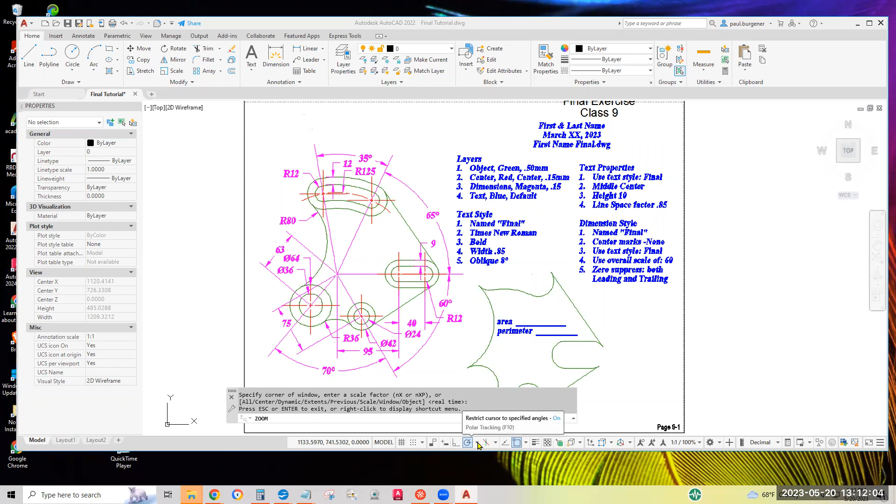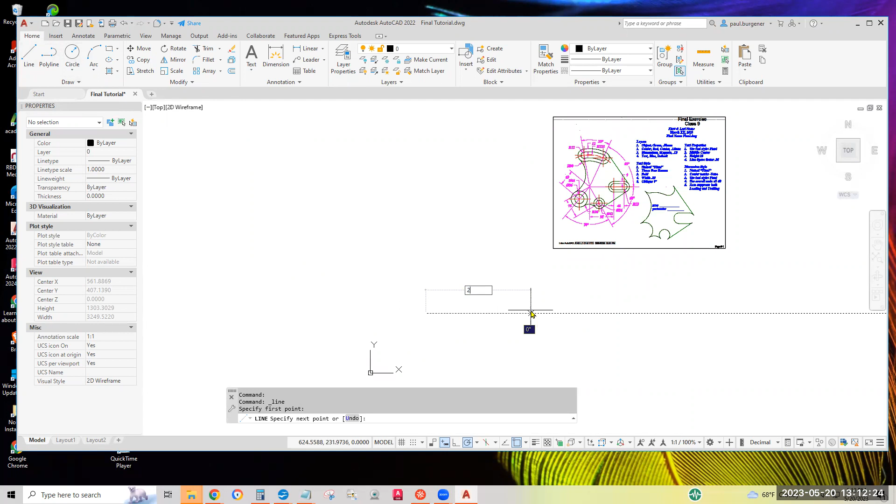It's probably easier just to draw a horizontal line and rotate 65 degrees, rotate a copy 100 degrees, rotate lines instead of adding additional angles to the polar tracking settings. So let's get this screen capture out of the way. I'll draw a line, say 200 units. Probably could be less, but I'll draw a line 200 units straight to the right. I'm going to make several copies on the top of itself and rotate one or two of the copies at a time into the right angles.

We'll use the copy command, select the line, enter, and for base point, pick any object snap, end point or midpoint. And for the second point for each copy, just click again on the exact same O snap. 1, 2, 3, 4, 5. Probably more than I need. I'll hit enter or space bar to finish the copy command. Now, if I do a list or start to do the erase command, you'll see I got 4 there. Okay, I thought I had 5, but we'll make another one as necessary.

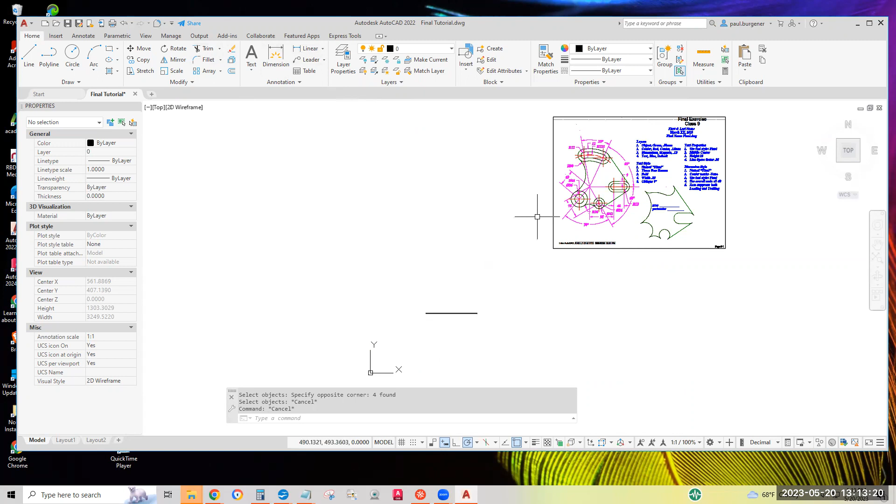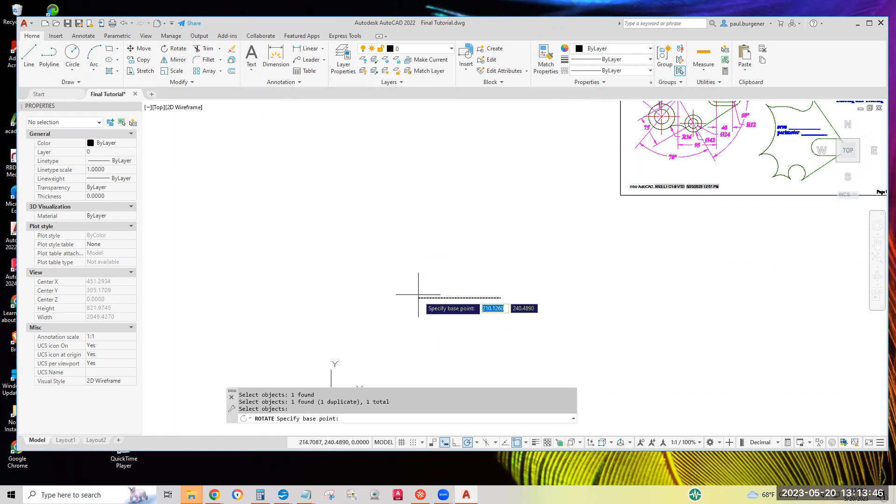Let's rotate to 65 degrees. So we'll rotate 2 of those 4 copies into the 65-degree rotation, then select one of those 2 and rotate it another 35 degrees. Okay, rotate once, 2, enter, O snap at the left end. What was that again? Positive 65 to go counterclockwise. 65, enter. I believe I moved 2.

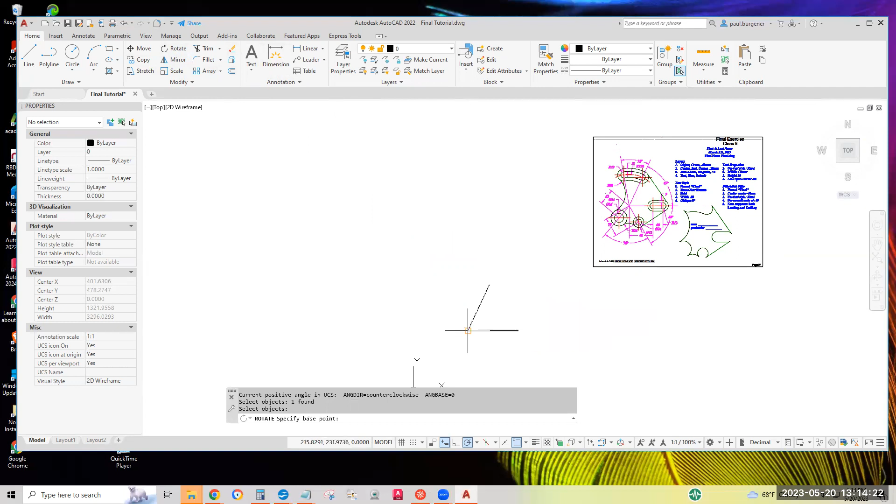Let's confirm that. I'll begin to erase, but won't complete. Nope, just 1 found. All right, I'll copy it on top of itself then. And copy there. Now let's rotate one of those diagonal lines. I got 2 there now. Rotate, select one, enter. Base point for the rotate command should be the bottom end. We'll rotate it 35 degrees, up to 35 degrees, so it'll be pointing in the 100-degree direction. 35, enter.

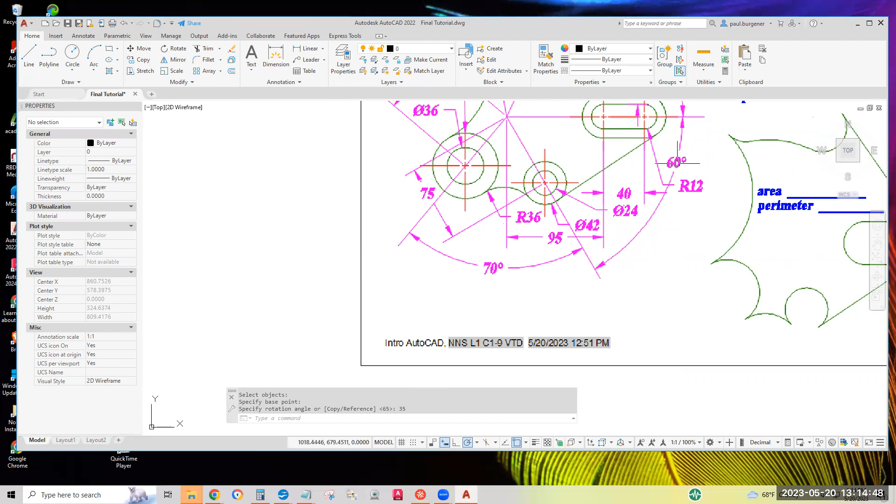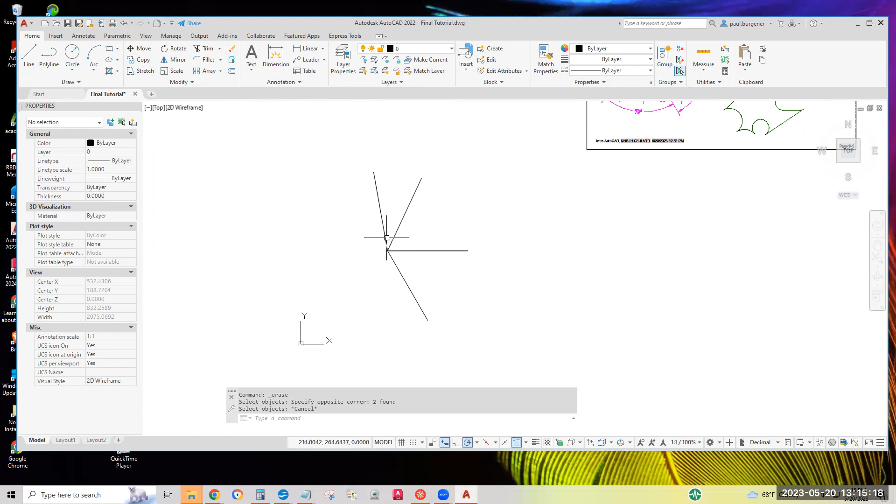Still got a few lines down here. We'll rotate 1 clockwise, so it'll be a negative rotation, negative 60 degrees. Okay, I rotate again. I'll select 1, hit enter, O snap at the left end, and type negative 60 degrees to go clockwise. I believe I still got 2 here. Let's double check. Yep, 2. This is a stack of 2 lines right here. So I'll rotate one of them negative 130 degrees for the final leg of the 5-legged spider.

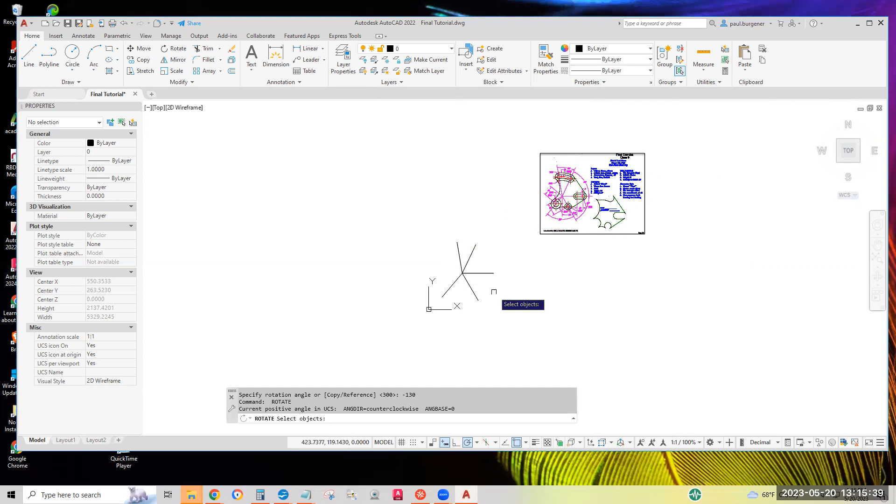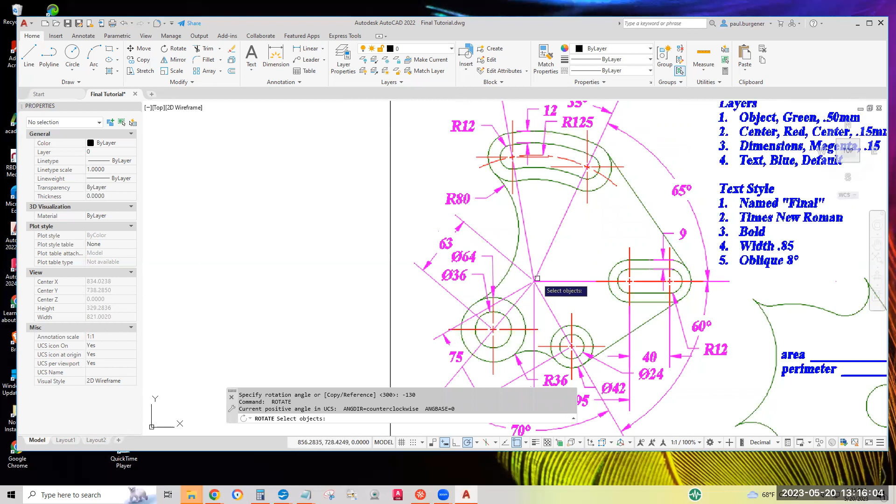We'll rotate. Select one of these, enter, O snap at the center of the spider body, and type -130, enter. So I might have the double line or two, but at least I got 5. Okay, let's start with the jelly beans at the top. I need to find a point for the left and right circles to form this jelly bean shaped slot. Both of those endpoints are exactly 125 units away from the center of the body.

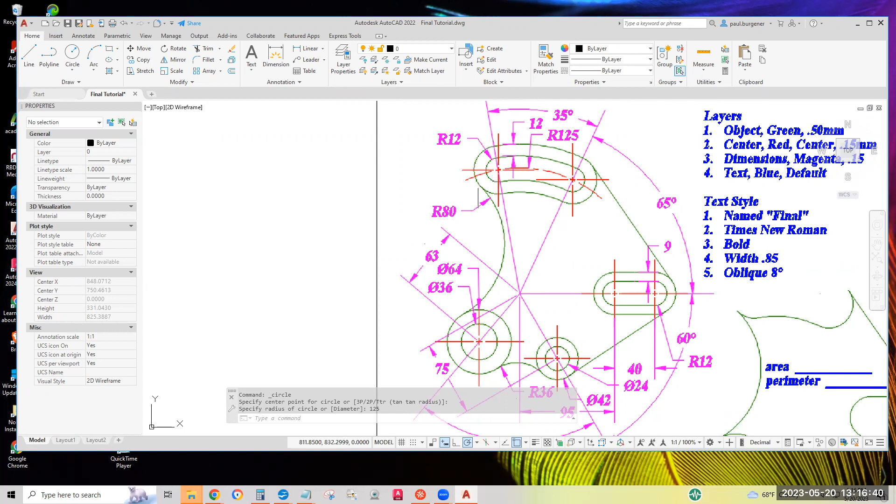So we'll draw a circle using the center radius icon. O snap at the center of the spider and type 125, enter. And again, the lines I drew are a bit excessively long, but that's okay. Let's draw circles at each of those two intersections. Both small circles are a radius of 12, and the large ones are an offset of that 12 units outward. So 24 radius would be the big circle, or just offset 12 out. We'll draw a circle center radius, click there, and 12, enter.

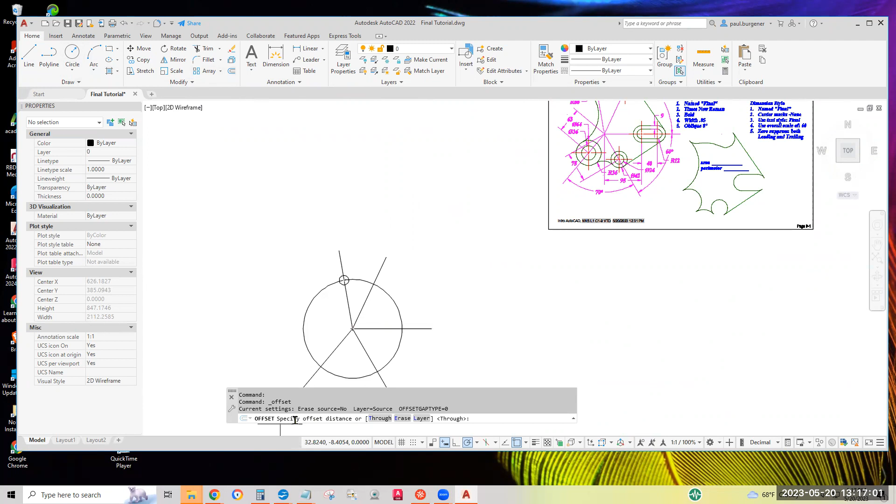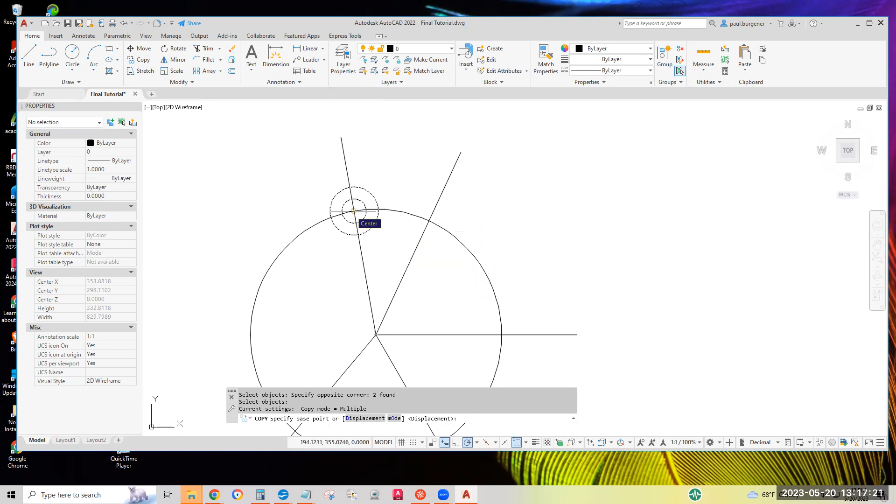We'll offset that circle we just drew 12 units outward. Offset command says specify the distance. That'll be 12, enter. What do you want to offset? Select the circle. Which way do you want to offset it? Click outside. Now to get those two over here, I'm being incredibly lazy. I'm just going to copy these two with a crossing window, hit enter. For base point, I'll use the center of the circles or the intersection. And for the second point of the copy procedure, I'll go over here to the intersection of the line and the circle.

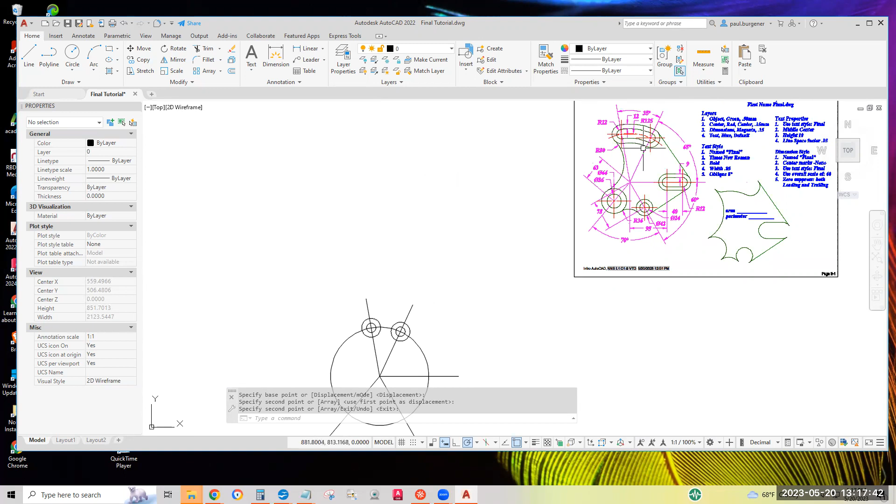Okay. What else do we need? Outer arc, a couple inner, looked like eventually 4 arcs here, O snapping at points of the circles I drew and the diagonal lines I drew.

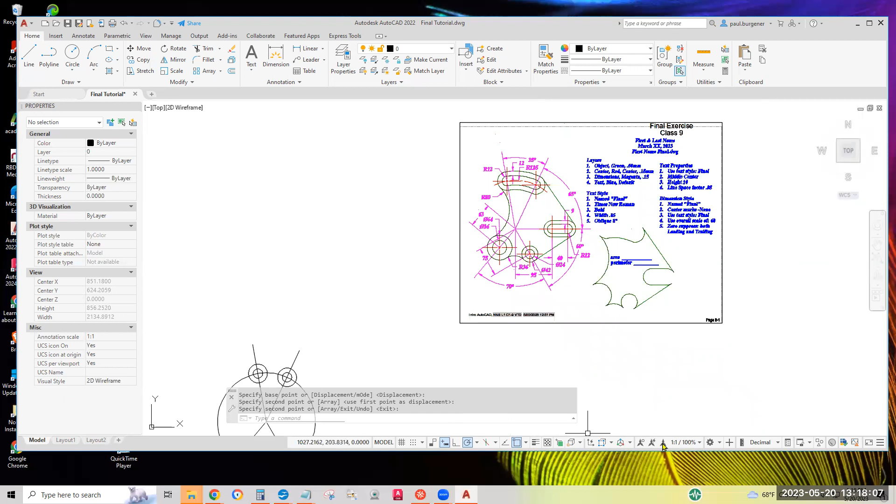By the way, as always, I got dynamic input turned on. Polar tracking is set for 90. And for object snaps, I got the 5 I always recommend: end, mid, center, quadrant, and intersection. Nothing else is turned on. All buttons are visible. Let's machine gun a bunch of

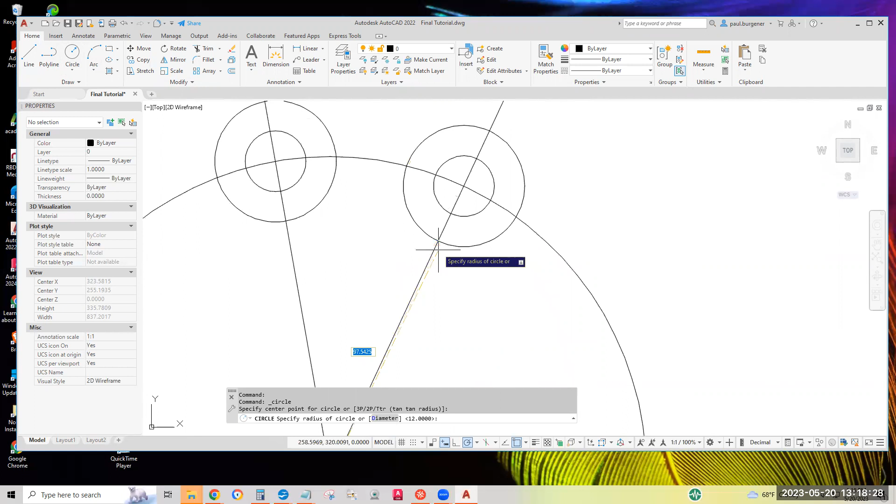circles. O snapping. Whoa, see how close that midpoint is? Good thing I caught that. Okay, and coincidentally, the line is almost twice the distance there. So, okay, very carefully slide up to the intersection there. Circle center again, O snap at the center, O snap at the intersection, not the quadrant, but the intersection here.

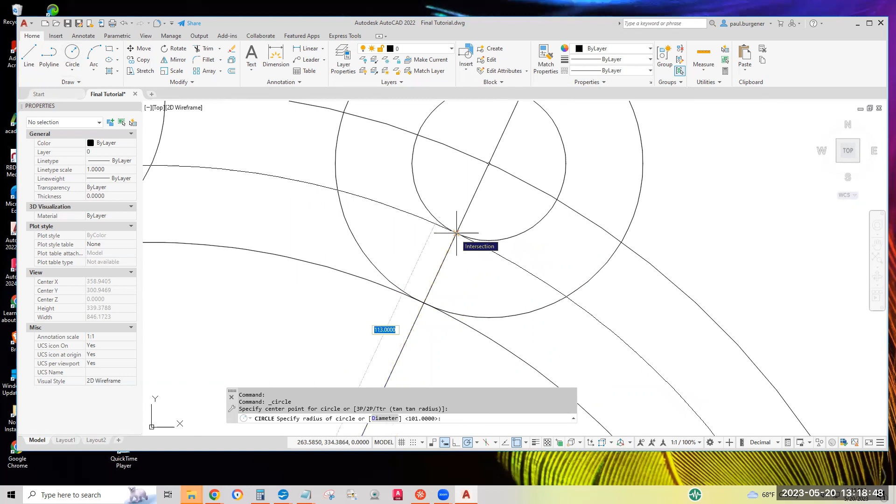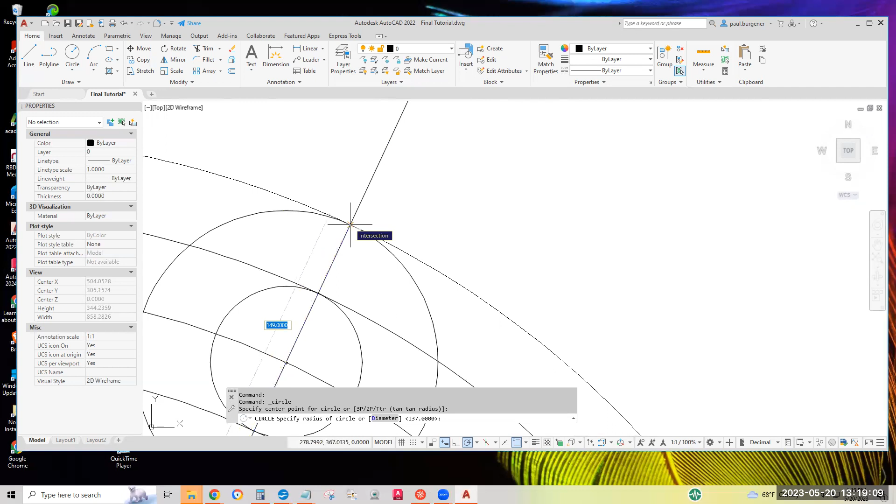Circle center, O snap again, click at the center, zoom up and O snap at the intersection again. And one more. Center at the center of the spider body and up to the intersection furthest out. There, you can see once we delete and erase, we'll have that slotted jelly bean shape up here. Let's work on this jelly bean over here now.

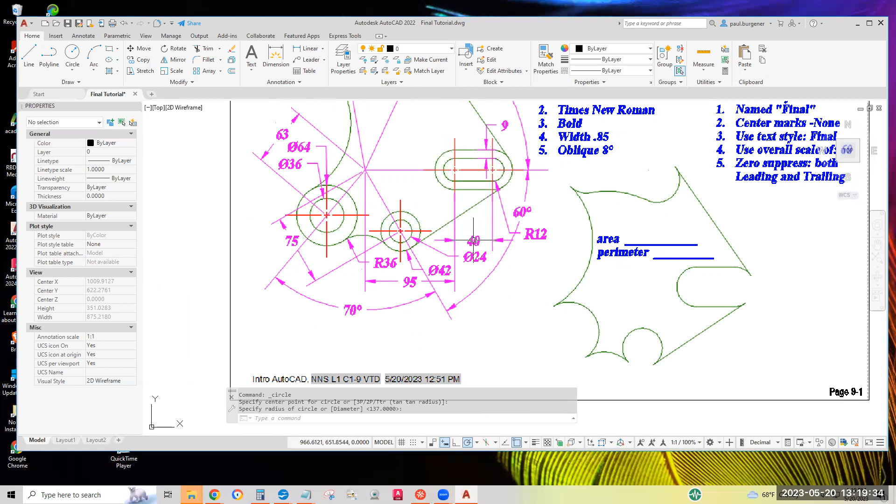The left end of the jelly bean is 95 units to the right. And then the right end of the jelly bean is another 40. So let's draw a circle center radius with a radius of 95, enter. Right there is where we want to begin the left side of the jelly bean. The circles for the left side are radius of 12 and a radius of 12 plus 9, 21.

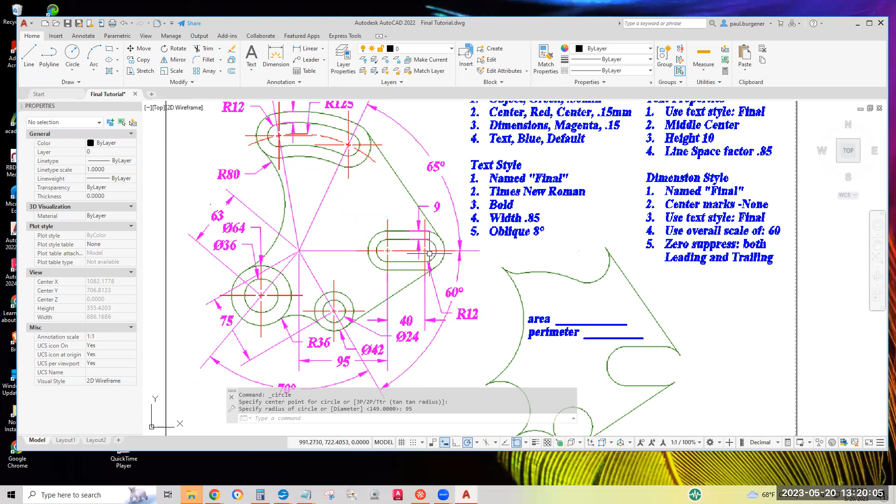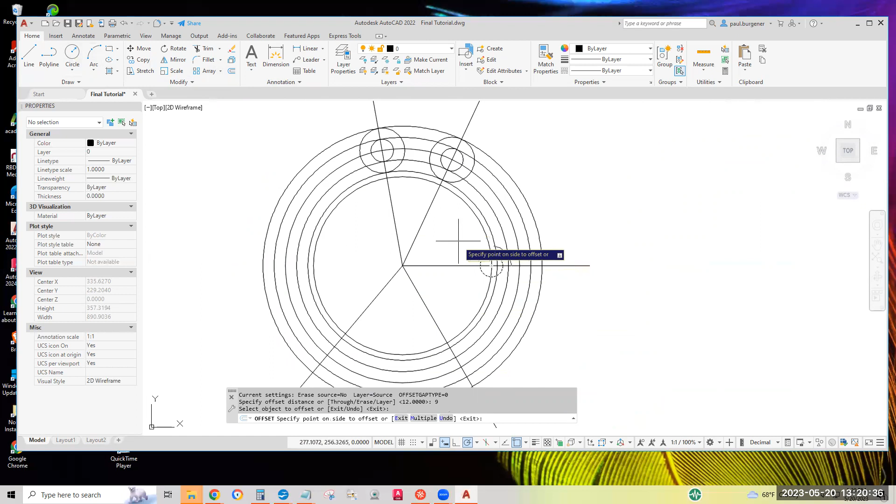Or we'll just do the same thing here. We'll draw the 12 radius circle in the center here and offset it 9 units outward. Okay, 12 and 9, I got to remember. We'll draw a circle center radius starting at that quadrant. It's also the intersection. AutoCAD just happened to home in on quadrant first. The radius of this small circle will be 12. We'll launch offset, set the distance for the offset command to 9, enter. Select our fresh circle and click outward.

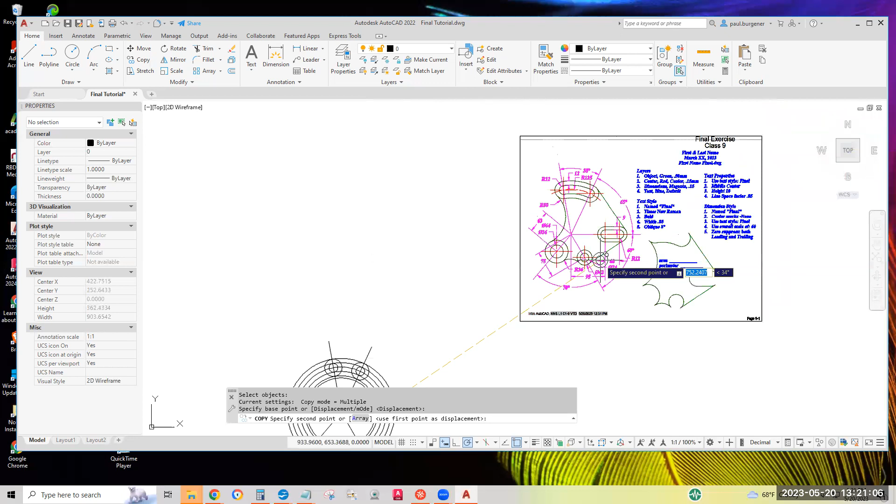Now, the right side is 40 units further to the right, so I can copy those two circles 40 units to the right to make the two circles for the right end of the jelly bean. We'll zoom back in, copy, select them both, enter. Base point would be dead center. I want it to go in this direction, but what was that distance again? 40. Line it up with polar tracking and type 40. Enter. And enter or spacebar to finish.

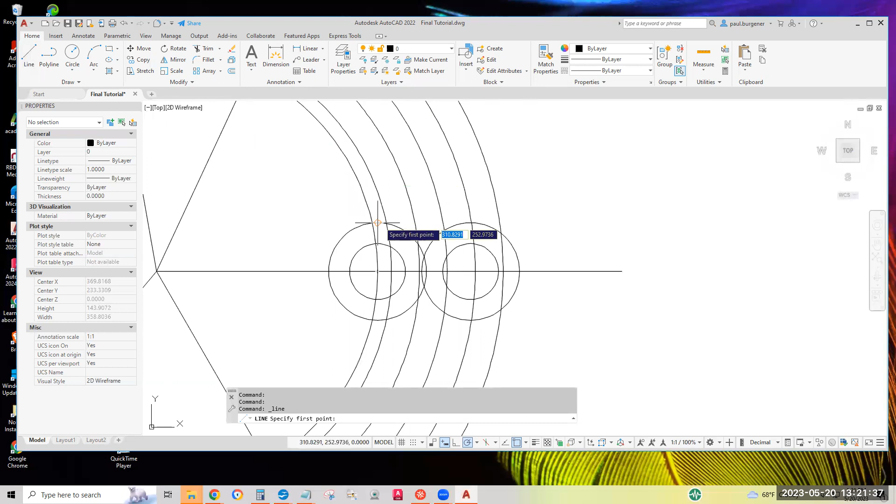Let me double check this. DI is a type-in to measure distances. 95, and DI from there to there is, whoa, there, 40. Yep, those are in the right order. I'll draw a bunch of lines from the quadrant to the quadrant, not to the intersection, but to the top quadrant of the circle.

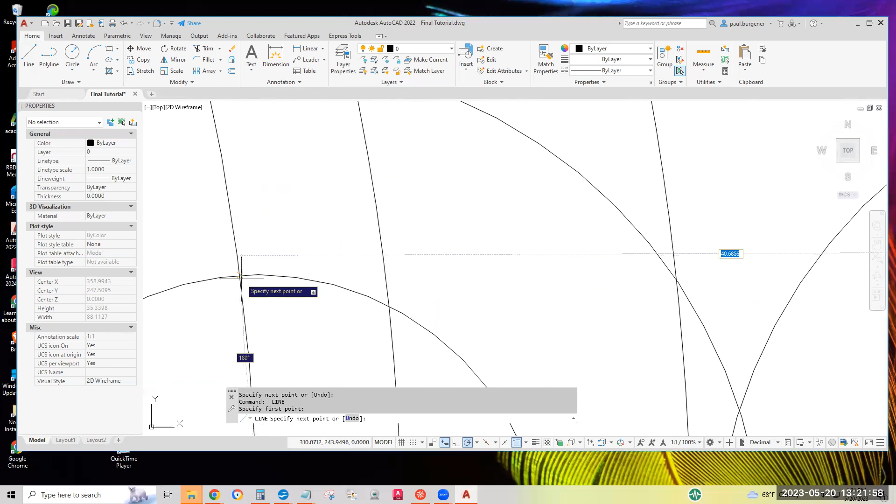Hit enter, enter to launch the line command again. Quadrant there to quadrant there. Being careful, don't click on the intersection. Quadrant. Repeat those down there, but it might be a second faster to simply mirror those two about any 2 points along the centers of the circles horizontally here.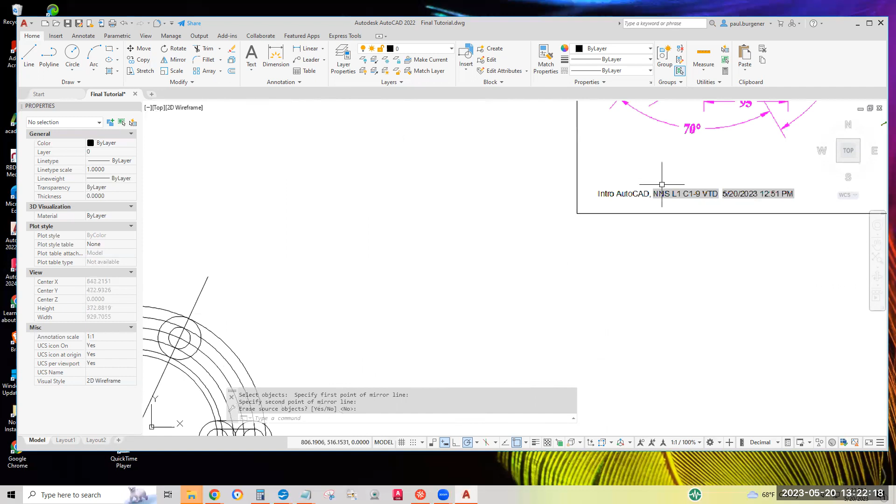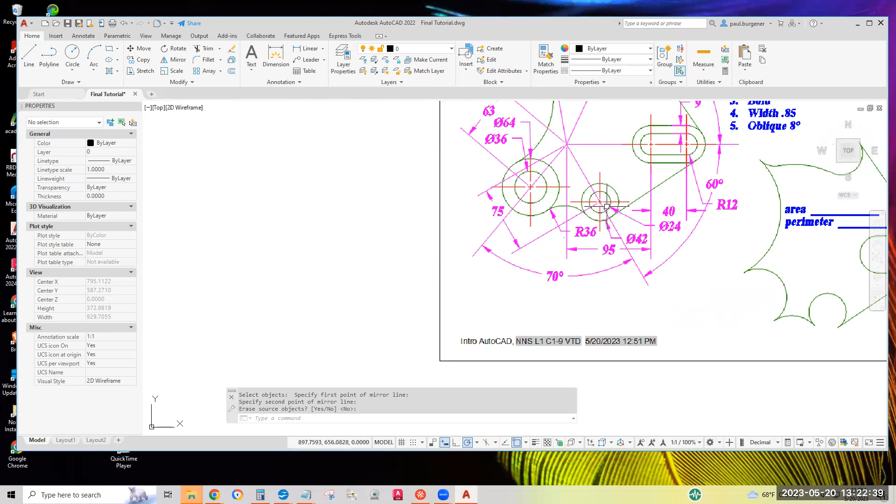What else? We need to draw these two circles. They are 75 units from the spider center. So I'll draw a circle to get an intersection to start. Diameter 24, diameter 42. Okay, so we're going to use center diameter now instead of center radius. I forgot them already. 75. Start a circle, center of the spider, 75. Enter. Okay, and that's where we want to draw those two circles.

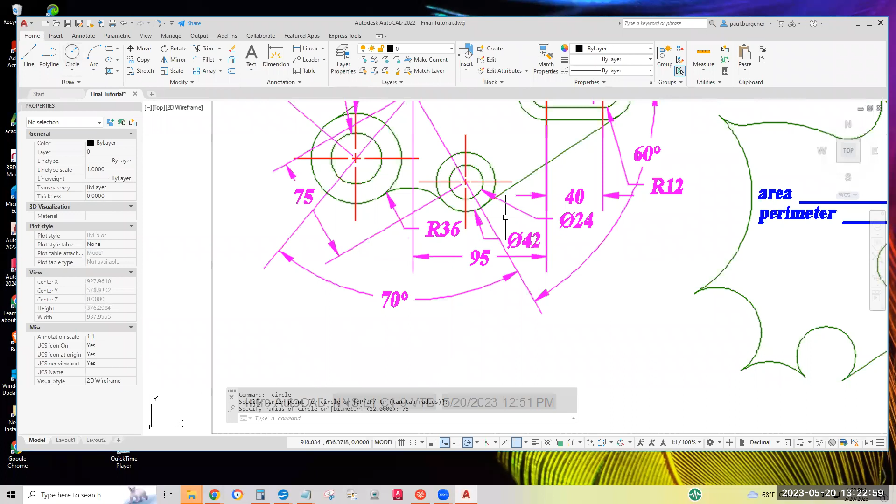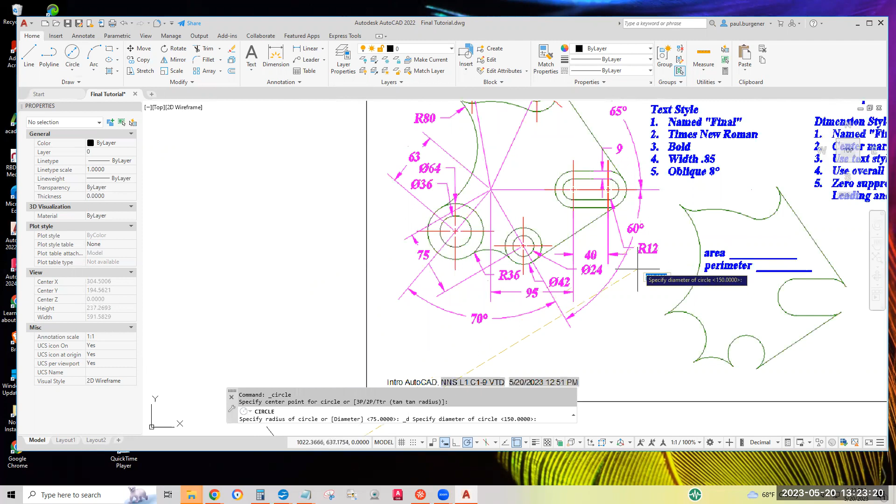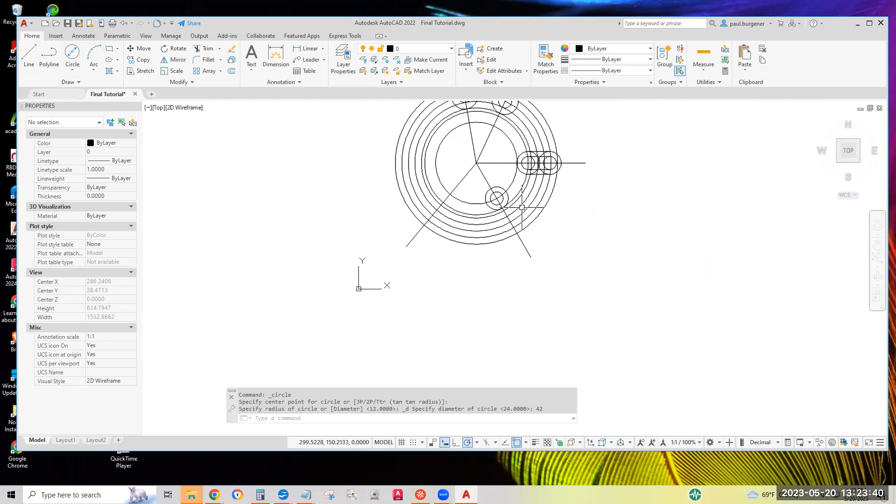Again, those are 24 and 42 diameter. Drop down the circle flyout toolbar, slide to the center diameter icon. O snap at that intersection. And how quickly we forget. 24 and 42. Okay, first one is 24, enter. Second one, same icon, same center point, 42. 42, enter. Now, the last pair of circles is this one down here at the

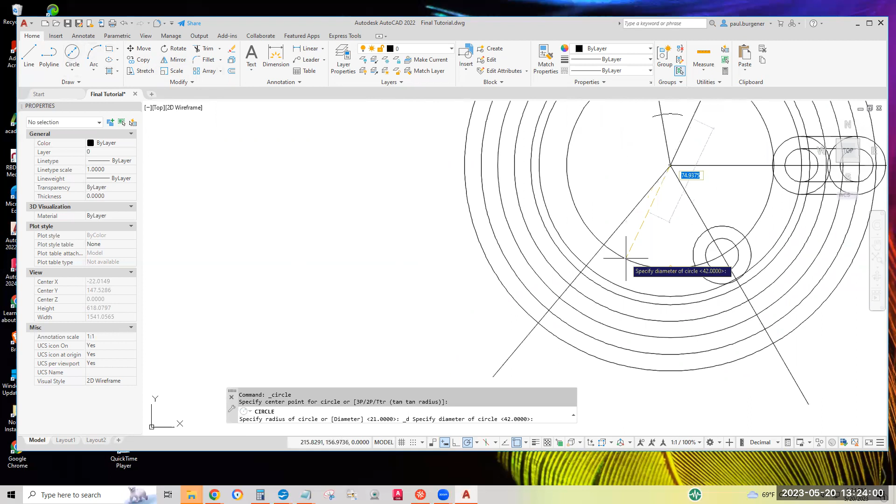negative 130 degrees direction. They are at 63, so I'll draw a circle at 63, being very careful to look where it pops up. 6, 3, enter.

Okay, let me stop the recording and see what's going on. Okay, I carelessly used the circle center diameter to locate that. So this is exactly half the size. Well, let me erase it and do it correctly. I'll hit erase. Come on. Erase, select it, enter. Double checking again here.

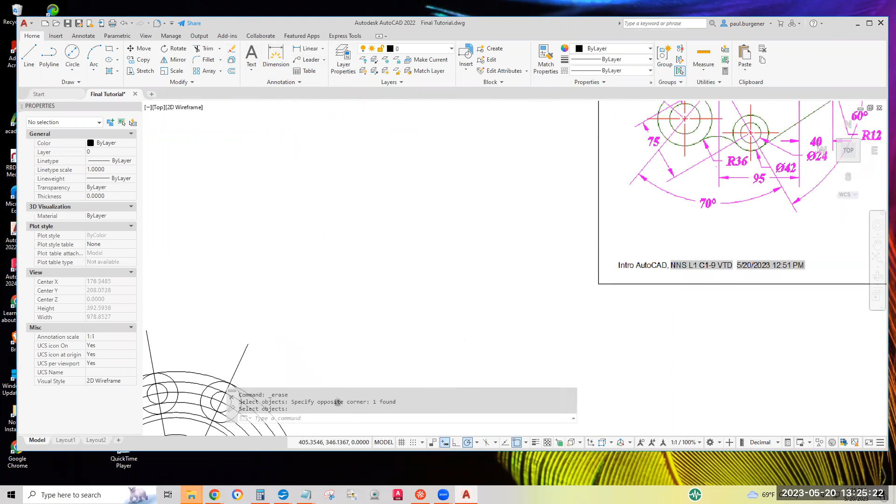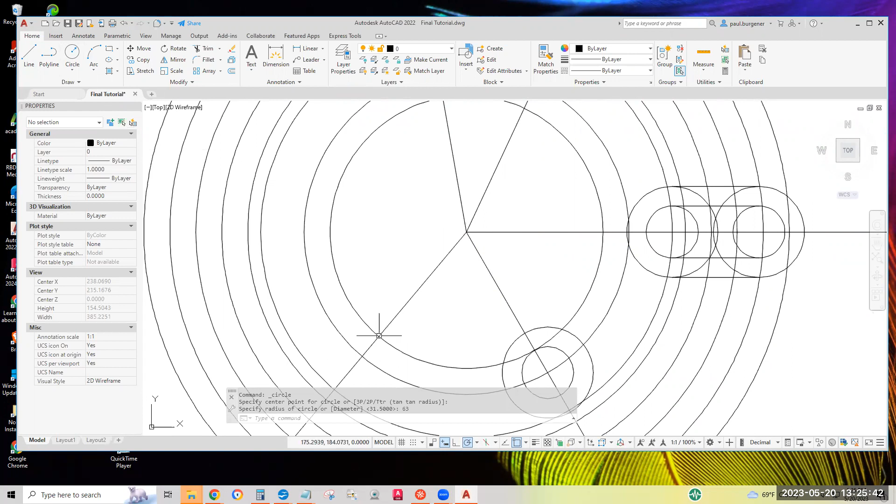63 radius from the center of the spider. Drop down center radius circle icon. Osnap at the center of the spider body. 63 radius. That looks right. Right there is where we want to do the two circles. And they are 36 diameter and 64 diameter. 36 and 64. Right there.

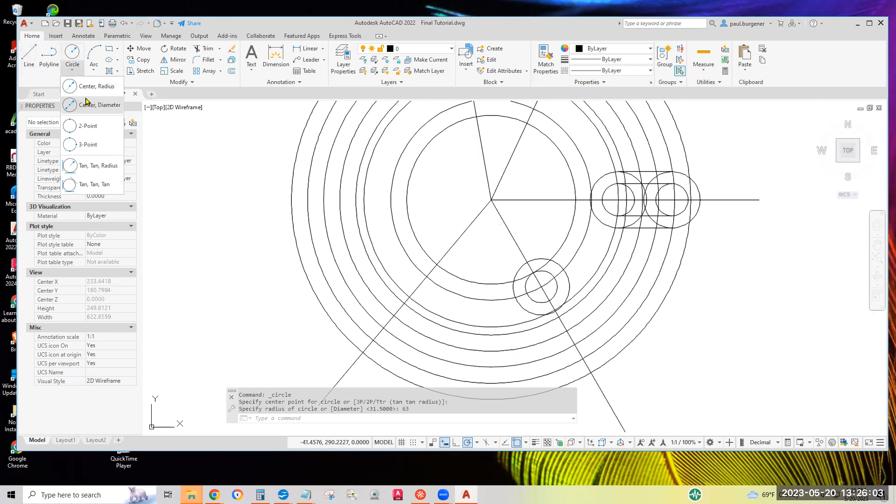Circle center diameter, Osnap at the intersection. Gosh, how bad my memory is. 36 diameter and 63 diameter. Osnap at the intersection. 63 diameter.

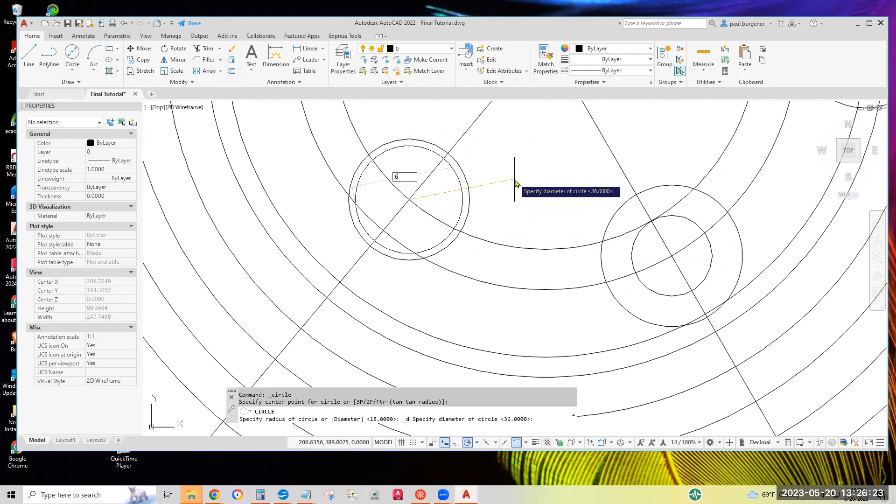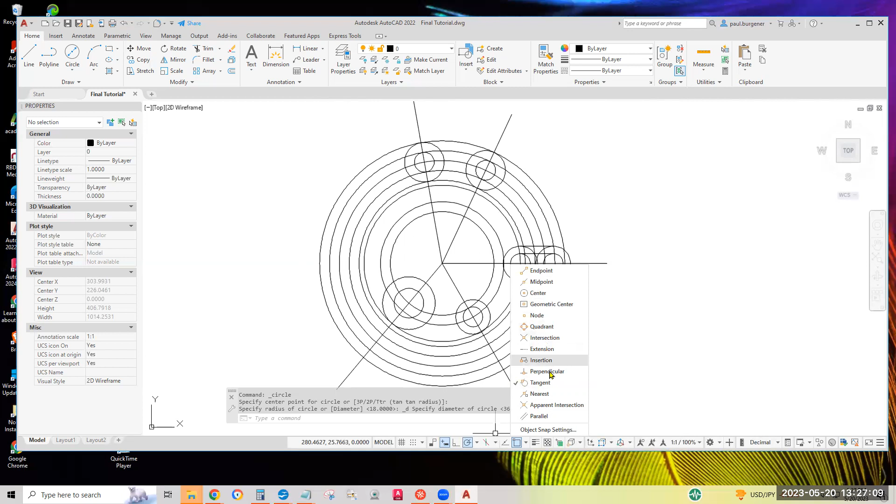So now it's just a matter of, well, okay, still got to draw the tangent to tangent, tangent to tangent, and two more fillets to get the concave arc here and here. Let's go ahead and draw them and then whittle things down to what we want to draw. Tangent to tangent for these two lines with 4 points, probably would be worth an investment of shutting off all Osnaps and only running tangent. Tangent and quadrant won't play together, so I'll just run tangent alone.

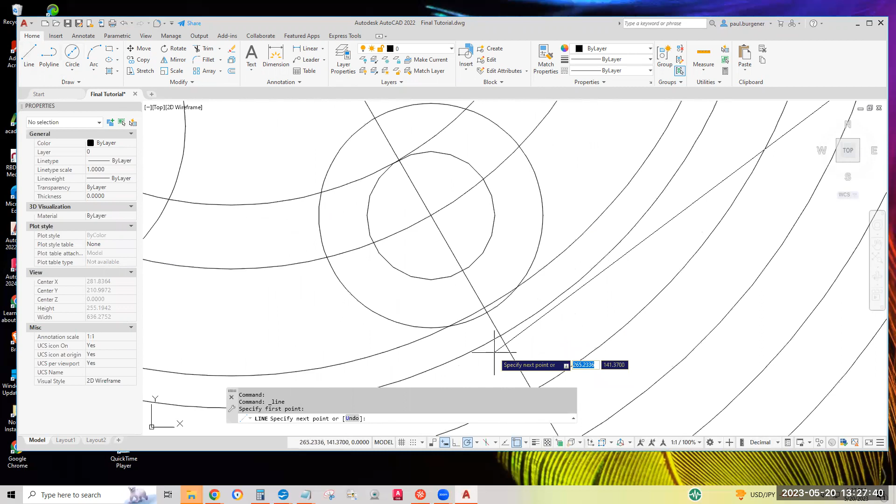Line, we want a tangent approximately there to approximately there. AutoCAD got it perfectly, tangent to tangent. There and there. Hit escape to deselect, launch line again. Osnap approximately there to be tangent. And zoom in and approximately there to be tangent. Enter to finish. There's the ends of the lines perfectly at tangent, not at the intersection, definitely not at the quadrant. So those two tangent to tangent lines are good. That line and this line.

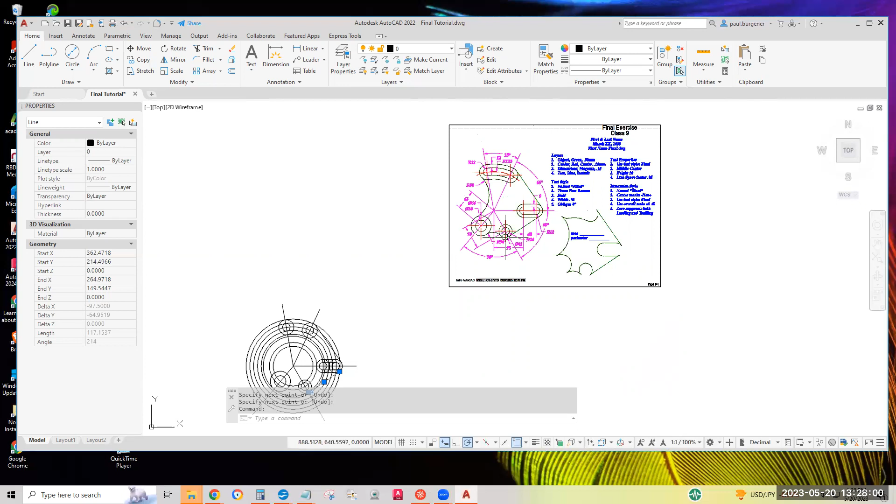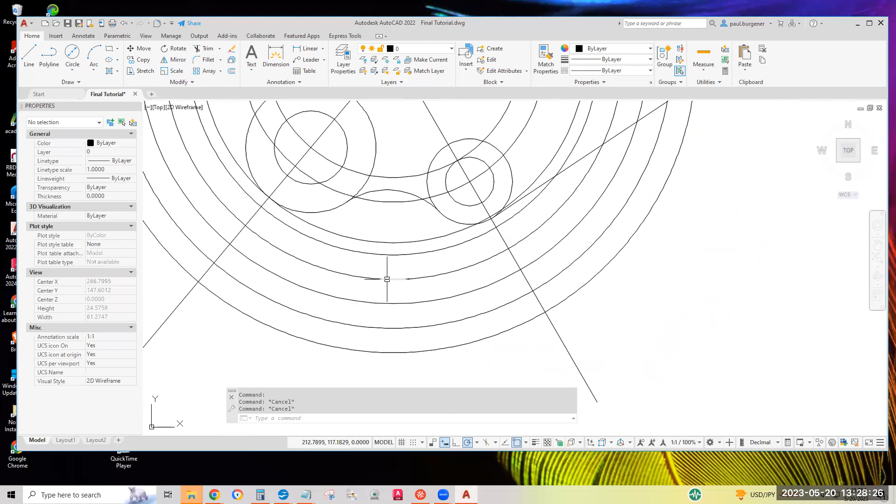Two little arcs. This one is a 36 radius. Hit escape, escape, fillet, radius setting, 36, enter, click, click. In the vicinity where I expect it to appear. Double checking here, we'll select that, and it is a radius of 36. Good to go.

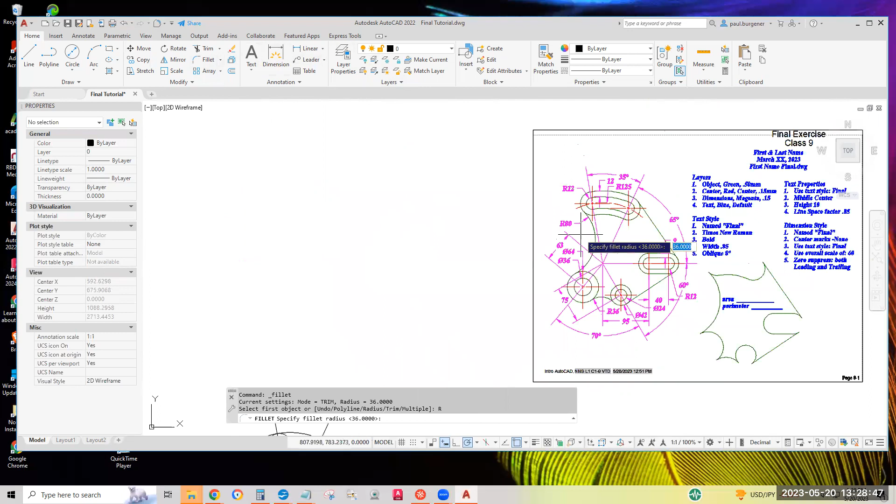Now this last arc here is 80 unit radius. So we'll launch the fillet command again and set the radius to, gosh, my memory, 80, enter. Osnap where I expect the fillet arc to touch. Double check, escape, escape. And this is 80 radius.

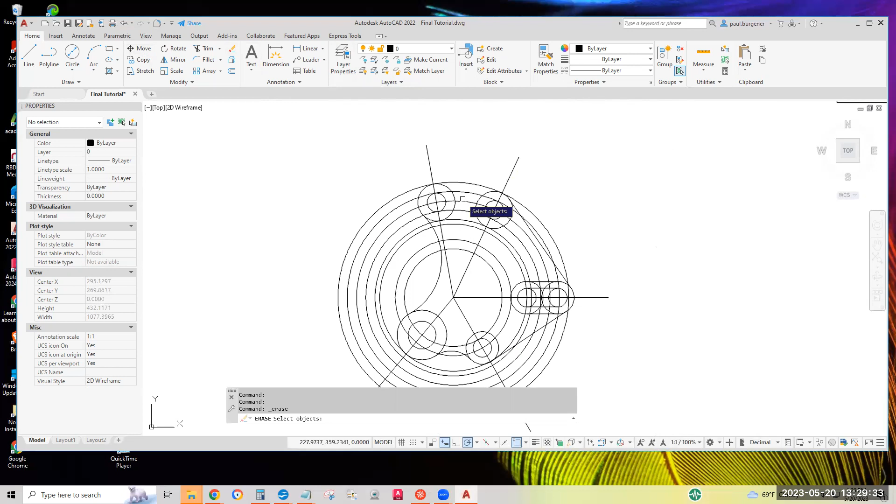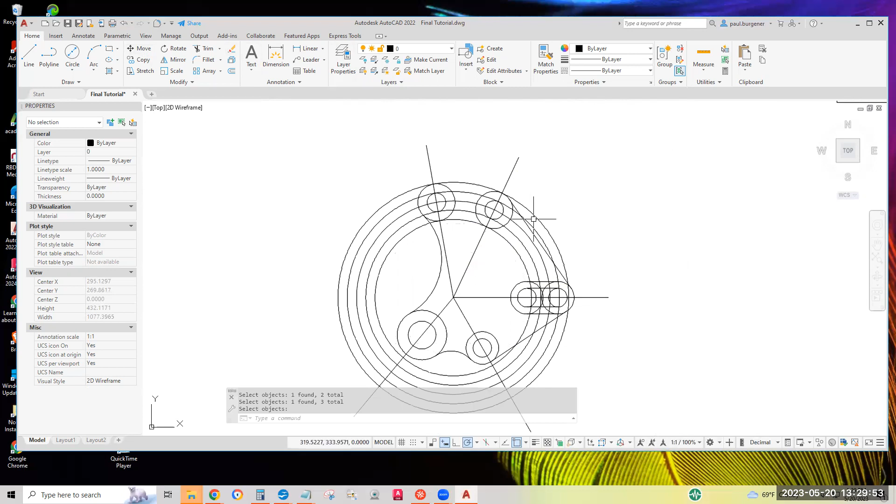Okay. Now, some of these lines, like we could later use this circle for center lines, but I'm not going to be picky about how you draw your center lines and your crosses in the middle. So I think I'll erase all guidelines that aren't needed for the green lines. Well, we won't need that one. Won't need that one. Don't see a need for that one. Okay, now we'll need part of this one. We won't need the second one there. No, need a piece of it there. Don't see a need for this one because I'll manually put center marks and just skip the impressive arc through the two circles. Enter to finish. Okay.

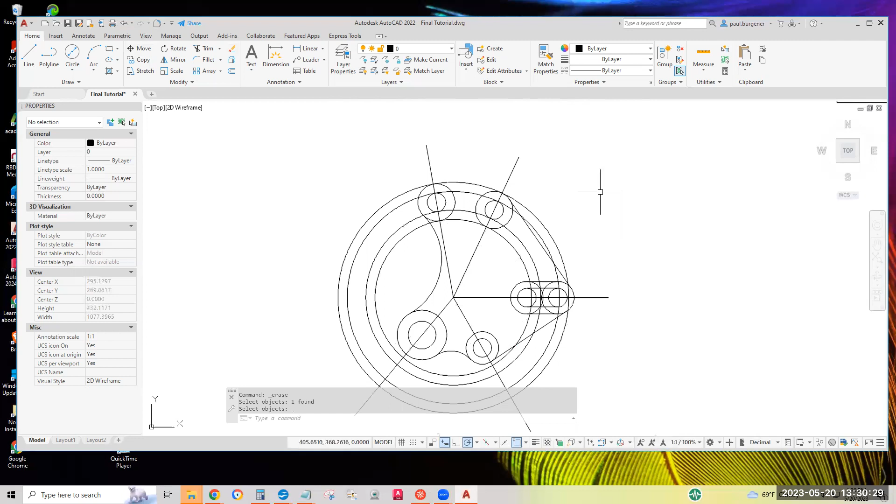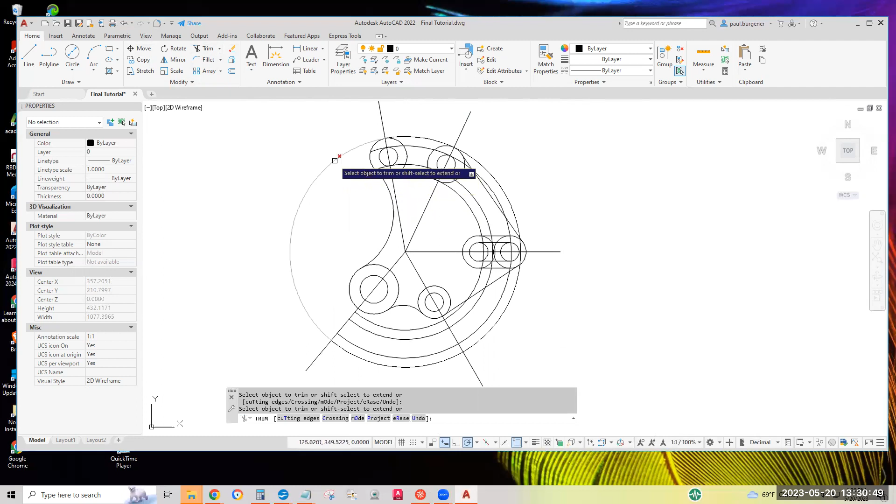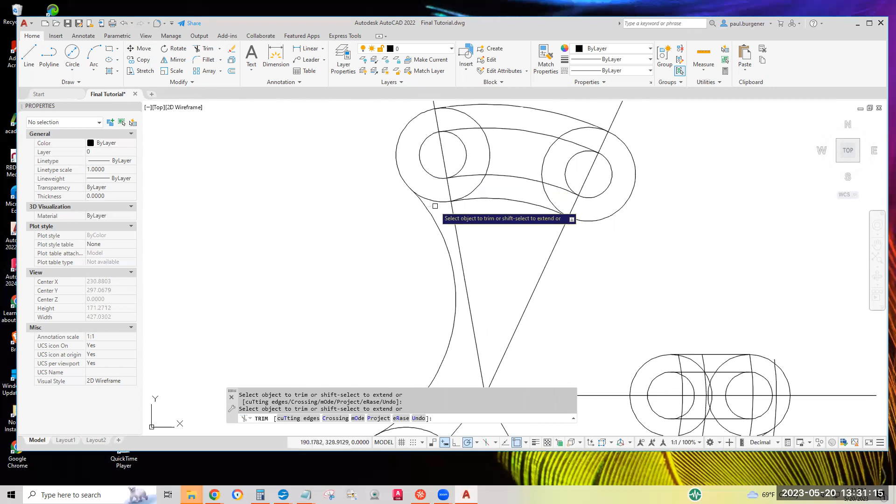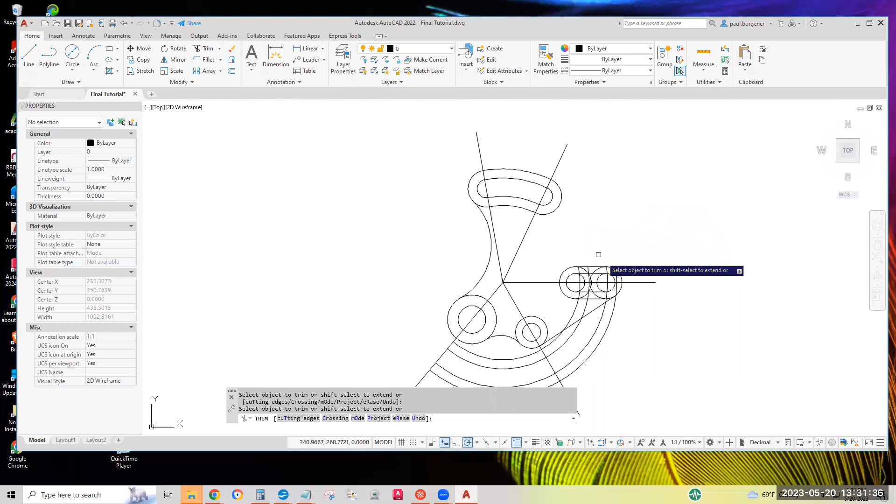Got to save parts of these 4 big circles here. Let's launch the trim icon. Remember, everything is a cutting edge, so I'll have to click a lot to whittle it down. Whoa, there's a little piece that would be easy to forget. See, we can whittle those down. Remember, the trim command emulates the erase command also in 2022. What happened to that one? All right, I still haven't set back my Osnaps, so let's redraw that tangent to tangent again.

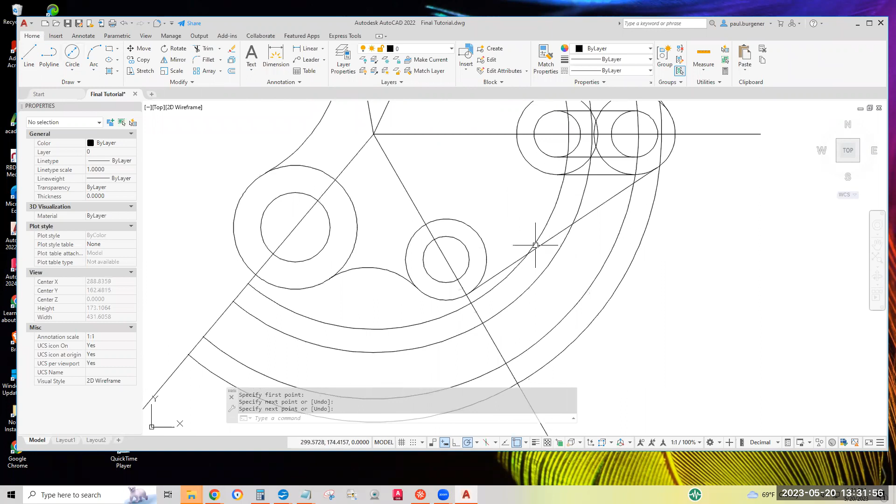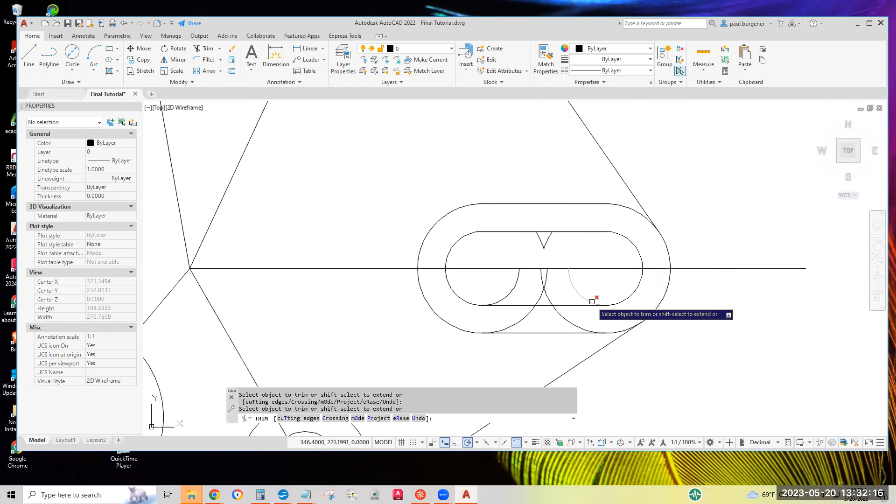I believe I can erase these 4 big arcs. And we'll just grab them here with a crossing window, enter. Trim away this jelly bean, trim, click, click, click, click, click. And I'll hit escape to end. Wasn't done, a little time saver, but I'll go to erase and select those 4 arcs with a regular window and hit enter.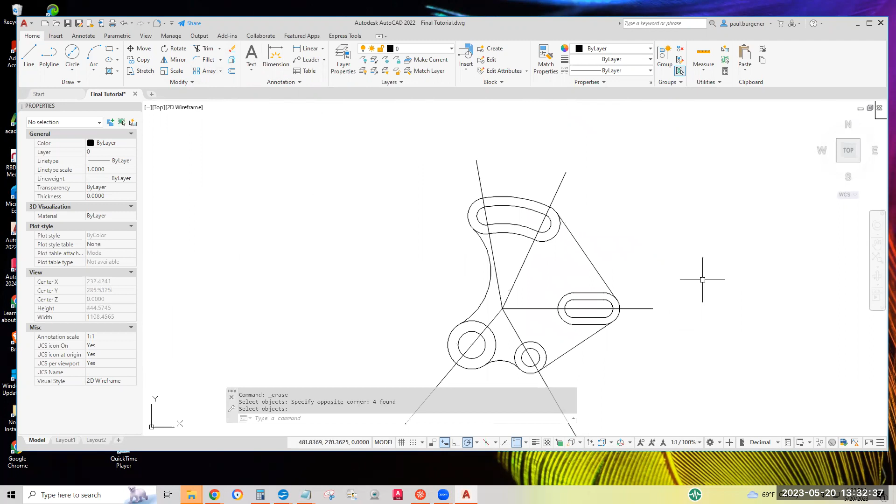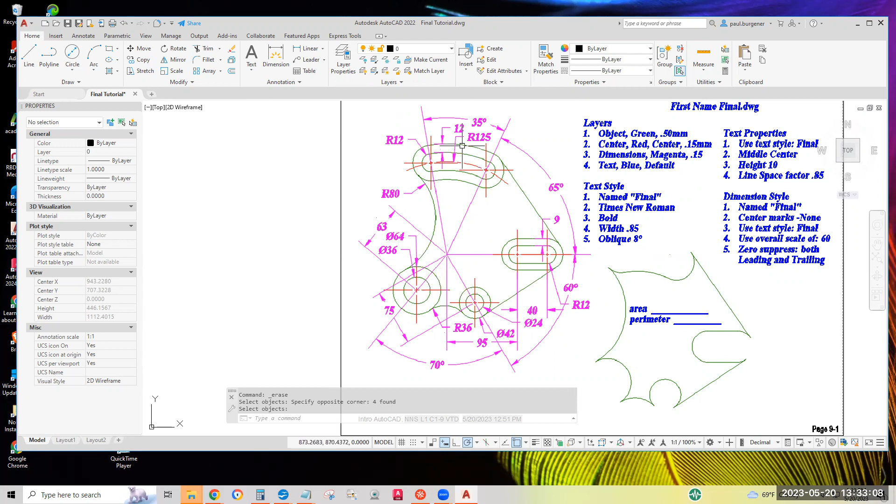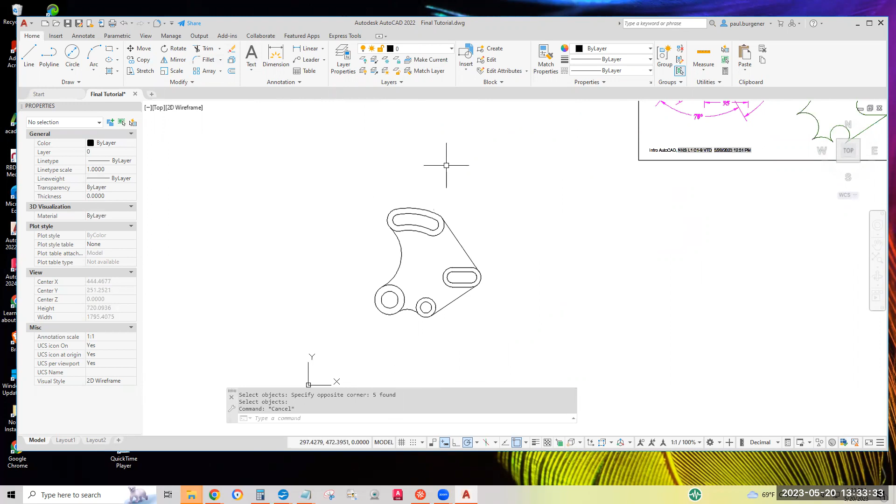Now again, you'll probably use these legs as dimensioning lines, to dimension the angle, but we'll cover dimensioning later. I'll redraw them as necessary. Remember, that point there is the center of this arc, center there, center there. So I can find that point again by homing in on the center of any of these 4 green arcs here. I'll erase them for now and redraw them after we dimension, hit enter. And that should be all the green lines. It's just on layer 0. That's all I got for layers now, but that'll be all the green lines once I develop the object layer, assign it green, and assign it the heavy line weight. 0.5, half a millimeter line weight.

So far, so good. We'll stop the recording and maybe I'll get to building the layers, text styles, text properties, dimensioning, and area and perimeter, and possibly something else I forgot. Let's stop this recording.